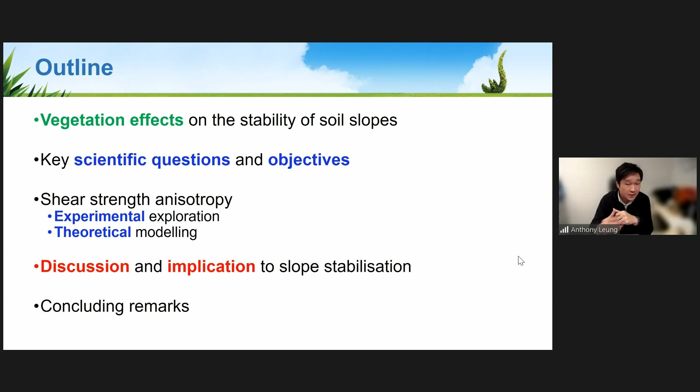Vegetation is a nature-based solution we can adopt to upgrade slopes in a sustainable way. This approach is environmentally and ecologically friendly, pleasing to see in urban areas, and can enhance biodiversity, ecological restoration, and carbon offset. But from an engineering perspective, vegetation can also be used as a tool to upgrade our slopes.

Mechanically speaking, plant roots could reinforce the soil, especially in the shallow region, to improve slope stability. Hydrologically, plants transpire, and during this process soil drying increases soil matrix suction, which could also increase soil strength. Today I will focus mainly on the mechanical effect, to explore how root reinforcement could be beneficially used in slope stabilization problems.

If you look at slope stability design, we can define a failure slip like this. Along this failure slip, the major and minor principal stresses of the soil are rotating. The reinforcement effect by the root depends on the relative orientation of the root and the direction of the major principal stress. So for a given root distribution, depending on position, the root reinforcement effect could differ because the major principal stress is rotating along the slip surface.

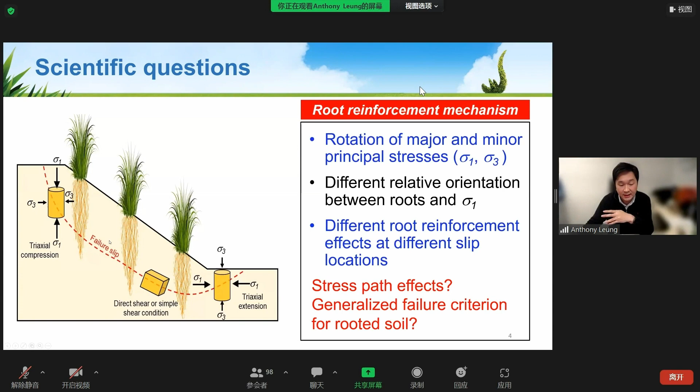So we ask the question: what are the stress path effects? Along the failure slip we have different types of soil shearing modes. Direct shear box testing is commonly used for evaluating root effects, but soil elements near the crest and near the toe actually experience not direct shear conditions, but triaxial compression and triaxial extension. So what would be the effect of stress path on the mechanical behavior of rooted soil?

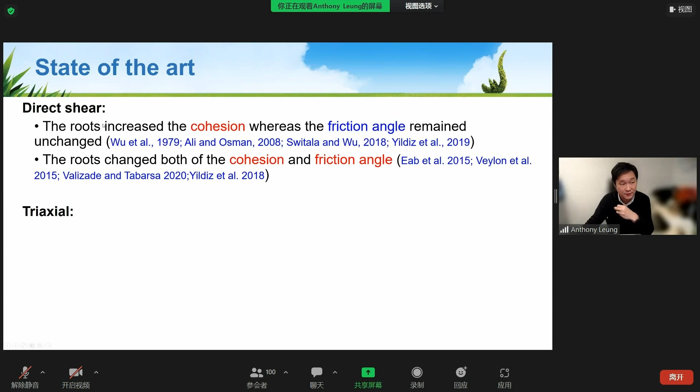Do we have any generalized failure criterion to describe the root effect on slope behavior? We looked into the literature on what's been developed in the last 20 or 30 years. Most studies focus on direct shear box testing, and most found that cohesion of the soil increases because of roots, but the friction angle remains largely unchanged. Only a few studies show that roots change both cohesion and friction angle. Those are for direct shear tests, but we do have some literature looking at triaxial behavior in compression and extension.

They do find some changes in the friction angle and cohesion too, but not a lot of studies. So we still find a lot of research gaps focusing on how the stress path would affect the shear strength parameters, including the dilatancy of the rooted soil, which still remain unclear.

Talking about the failure criteria, we have several models available to capture the root effect on reinforcement. One of the very famous models is the Wu and Waldron's theory, which assumes all the roots will break at the same time during the direct shearing mode. We also have the fiber bundle model to improve the assumption for the Wu's model by allowing progressive failure of the roots rather than simultaneous failure. And if we allow for a more expensive numerical simulation, there are finite element approaches using the p-y technique that could model the root-soil interaction for slope stabilization purposes.

None of these models have the ability to capture the potential anisotropy problem for rooted soil, because of the different orientation of the major principal stress and also the root orientation. There's no theory developed to address this anisotropy issue.

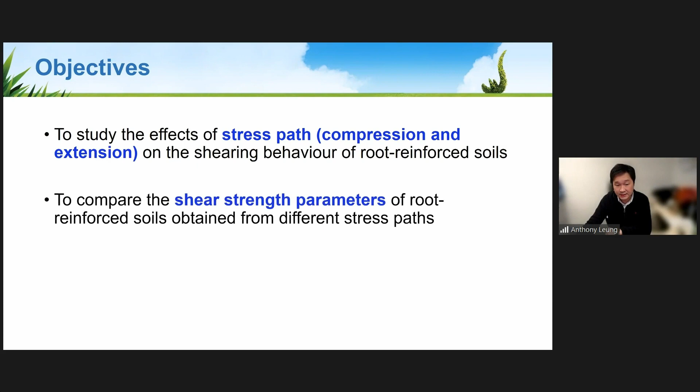Based on this, we developed several objectives. First, to study the effects of stress path, including compression and extension, on the shearing behavior of rooted soils, and to compare the shear strength parameters obtained from different stress paths. Based on experiments, we hope to develop a model to capture the shear strength anisotropy of rooted soils.

We use the triaxial testing system available at the Hong Kong University of Science and Technology. The soil we use is the local soil called completely decomposed granite, which is basically silty sand. We compact the soil to a degree of compaction of 80%, achieving a dry density suitable for plant growth in the urban area. This is the dimension of the triaxial samples we have been using.

After testing, we open up the samples to look at the root distribution using a scanner, so that we can better inform our modeling in the later part.

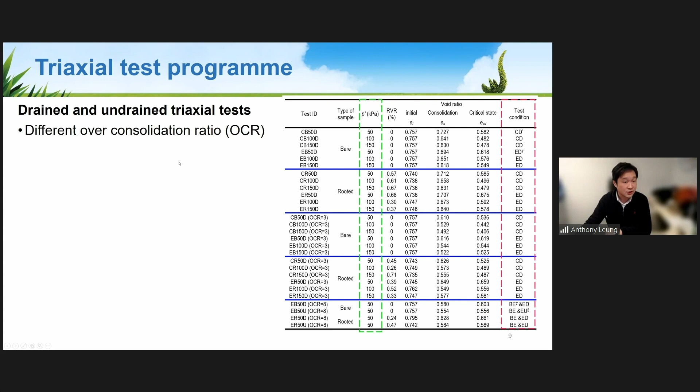We perform a standard triaxial test, drained and undrained shearing under different confining pressures, so that we can obtain the friction angle and cohesion. We also compact the sample to different initial densities, following a classic test procedure: first back pressure saturation, then drained consolidation to a given confining pressure, and then shearing at a relatively slow rate to achieve a drained condition. We also perform undrained shearing. I'm not going into details on this testing program, but we focus on different stress paths under different drainage conditions.

This is the typical result obtained from a normally consolidated soil. By the way, in the table here, we also investigated different over-consolidation ratios. So the OCR effect is also covered, but today I will just focus on the normally consolidated behavior.

Here is the stress-strain curve, deviatoric stress versus axial strain, for bare soil and rooted soil, both in normally consolidated condition. What you are seeing here is a set of stress-strain curves for bare soil under compression. If I superimpose the result from the rooted soil also under compression, quite surprisingly, you see the shear strength has been reduced by the roots. One reason is that as the root grows in the soil, it introduces interfaces between soil and roots, and the interface friction between the root and soil is much lower than soil-to-soil interaction.

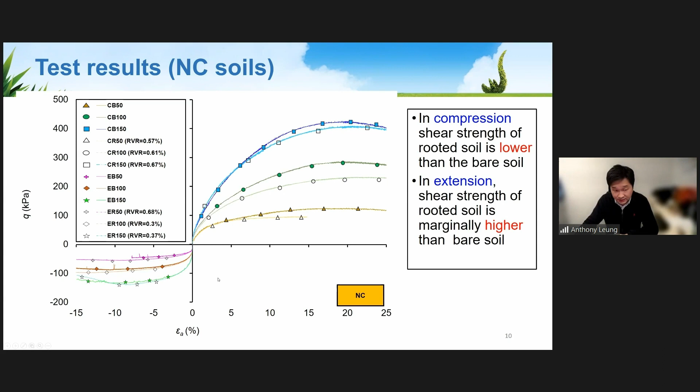So we observed quite interesting results. If you look further at the shear strength parameters, which means the friction angle and cohesion...

Now, if you look at the compression first, you can see that the rooted soil has slightly lower friction angle than bare soil. I already explained that's because of the creation of many soil-root interfaces. But if you look at the extension, the friction angle also reduced for the rooted soil, but the cohesion increased very significantly. You can see from 0 for the bare soil to something like 22 kPa for rooted soil in the extension, right?

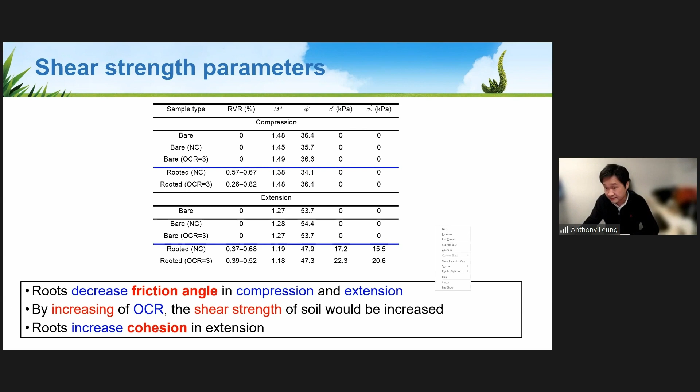That's what I just mentioned about the conclusion from these shear strength parameters. So in other words, the rooted soil behavior is stress path dependent, in other words, is anisotropic. So to capture these experimental findings, we try to develop a generalized failure criterion to capture this interesting behavior.

Now, in our experiments, we didn't observe any breakage of roots, so we couldn't use the philosophy or assumptions made by previous root reinforcement models like the fiber bundle model. So we have to assume all roots were not broken during the shearing. And one further assumption we need to make is that stress and strain are coaxial during failure.

And the root effects on the soil anisotropy can be described by an equivalent microstructure root network tensor. I'll introduce that later. Another important assumption we made is the cohesion and friction angle are independent of confining pressure. Now, I acknowledge this is quite a simplified assumption, but this is a very first model to develop, so we believe it would be easier or convenient for the development of our models.

So with all these assumptions, we try to define two fabric tensors. This tensor here, I won't go into the details of the mathematics, but it is to capture the soil microstructure without any roots, just on the soil structure itself for the bare soil.

Then we propose a new fabric tensor for root network to describe the root distribution. As you can see, the mathematical form is similar, actually the same as the bare soil fabric tensor, but using different parameters to capture the anisotropy or microstructure because of the root network development.

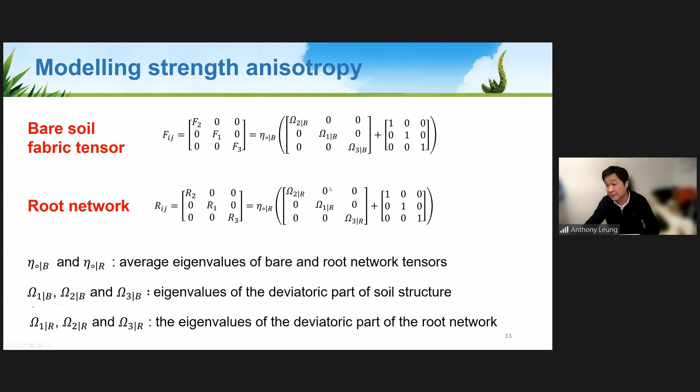So talking about the failure criterion, we adopted this Matsuoka and Nakai isotropic spatially mobilized plane model. This equation describes an isotropic soil, talking about the stress ratio or shear stress and the normal stress. So what we did here is modify this isotropic failure criterion to be anisotropic using the Kong et al. 2013 approach.

Basically, it's to project the microstructure tensor onto the direction of the generalized loading direction in that particular form. In other words, you can see this eta, which is an anisotropic parameter to describe the soil microstructure. We can further break it down using the previous matrix I showed you like this.

So what we did further here is propose another anisotropic parameter for rooted soil. If you compare those two equations, I have an additional term there to describe the effects of root network. So with this anisotropic parameter, we can then capture the anisotropy in this SMP model.

However, as I showed you earlier, the rooted soil is cohesive. Now, this Matsuoka and Nakai failure criteria is for frictional material without any cohesion. It couldn't perfectly model our rooted soil because it is cohesive, especially in the extension path.

So that's why we further expanded the formulation using the Matsuoka et al. 1990 model, considering cohesive soil. You can see the mathematical form is quite similar. Actually, it's just a transformed stress tensor so mathematically it's the same, but we have an additional term called bonding stress to capture the cohesion effect.

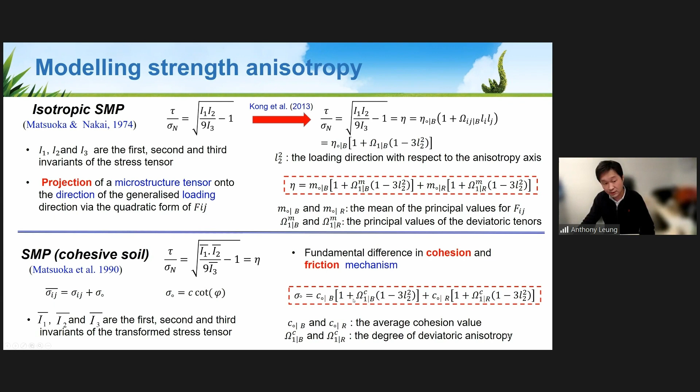Okay, so we then again modify this bonding stress by taking into account the root effect on the anisotropy of the soil. So these two red equations are the new development, considering the root effect on the anisotropic consideration of the soil microstructure, but also the anisotropy from the root network for the bonding stress. So now we have the mathematical model to describe the anisotropy of rooted soils.

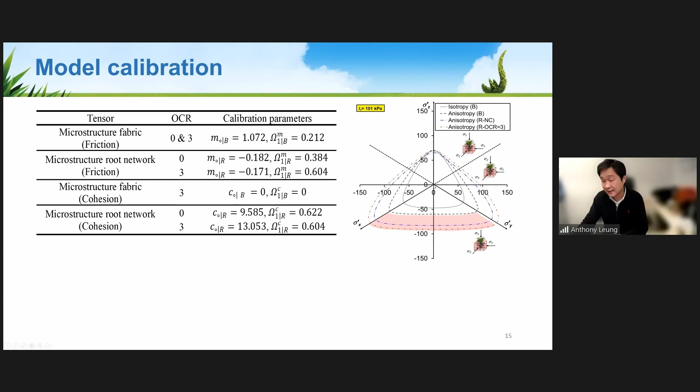You can see here the failure envelope for the rooted soil is always bigger than bare soil. That makes sense because the root is reinforcing the soil. But interestingly, in these two planes the root reinforcement is more important than other planes. So as an implication, as an engineer, you want to put your plant near the region where you have the stress path following sections 3 and 4, so that maximum root reinforcement can be achieved.

One important point to highlight: in the literature, for the direct shear box scenario, the friction angle didn't change much. That makes sense from our modeling, because the increase in friction angle is only linked to section 1, which represents the direct shear stress path. But if you look at the triaxial and extension path, the increase in friction angle and the change in cohesion are much larger. So our model also can capture the direct shear loading conditions, giving a quite generalized envelope for rooted soil.

Dr. Leung, you have 4 more minutes. Right, okay, so that would be my 2 last slides. Oh, okay.

We found that roots can also affect the friction angle, not only the cohesion as typically found in the literature. And evidently, root reinforcement effect is anisotropic and path dependent.

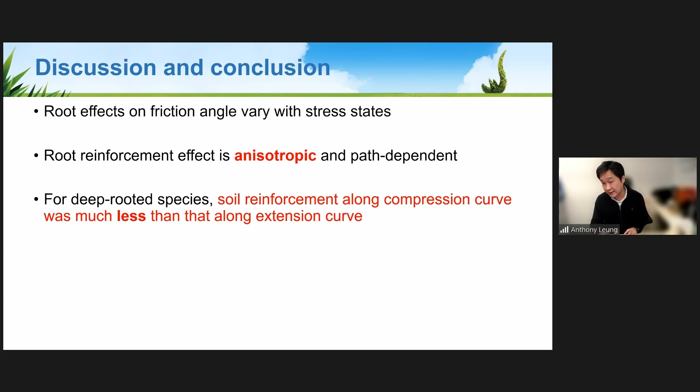For deep-rooted species like vetiver, soil reinforcement along the compression curve was much less than along the extension curve, because the major principal stress in compression is almost parallel to the root orientation for vetiver. But in extension, they are perpendicular to each other, so the root reinforcement effect will be much more significant.

So that demonstrates the anisotropic effect. Roots can mobilize the tensile strength much better along the extension path.

Coming back to our engineering problem, one advice we could take is that assuming friction angle to be unchanged by root may not always be true, depending on the slip position. For direct shear position, yes, maybe you can assume nothing changed in the friction angle. But for the crest and the toe, the friction angle could have been changed by the root.

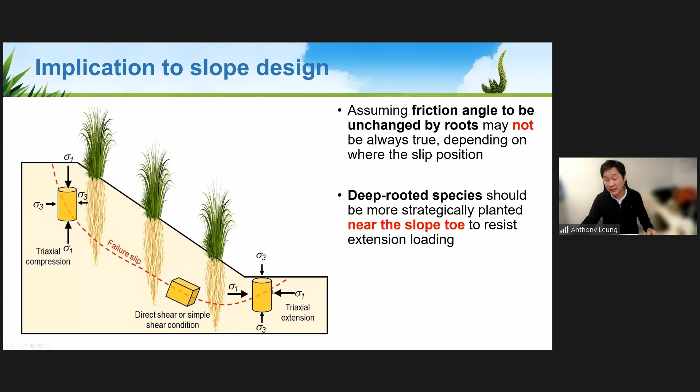If you select a deep-rooted species, we would advise putting it near the slope toe, because at that position extension is the more preferred failure mode, so the reinforcement will be more significant.

By the same token, if you have a laterally rooted species, you could put it near the slope crest, because at that position you will have a perpendicular direction between the major principal stress and the root orientation, giving you the highest root reinforcement effect.

So strategically, we shouldn't put only one species along the slope for soil bioengineering applications. We should smartly consider soil mechanics to arrange our species to maximize the slope stability effect.

All what I've been talking about is based on these 3 publications, which are already published, so if you're interested you are more than welcome to take a look. I also acknowledge my student, Ali Akbar, who produced all this very interesting work for this presentation. So that's it for my presentation. Thank you very much, and I welcome any discussion.

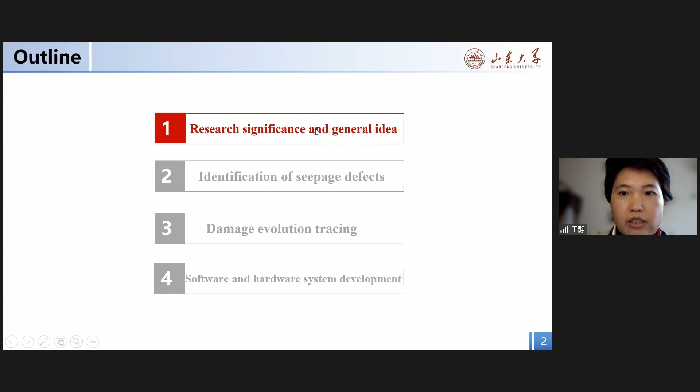My report includes 4 parts. The first one is research significance and the general idea.

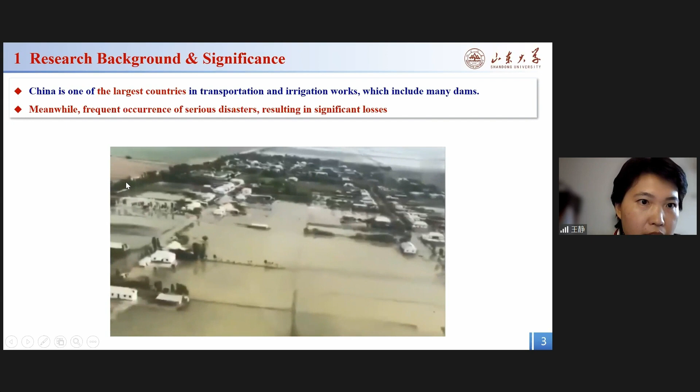China is one of the largest countries in transportation and irrigation works, which include many dams. Meanwhile, frequent occurrence of serious disasters results in significant losses. Leakage and breakage threaten the safety of the dams. Disasters are highly irregular in time and space, which are difficult to forecast. Regular inspection of dams is an effective measure to prevent disasters.

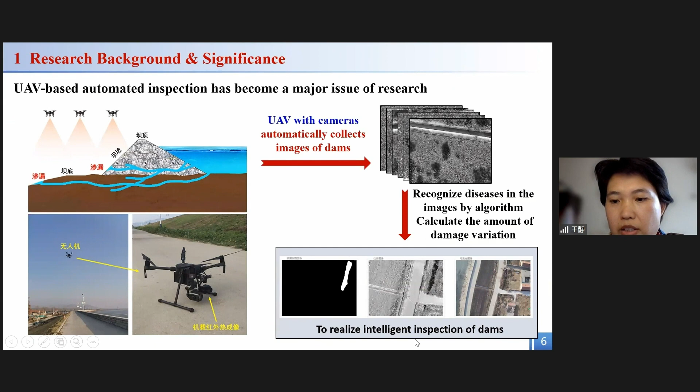UAV-based automated inspection has become a major issue of research. It can automatically collect images of dams and recognize diseases in the image. To realize intelligent inspection of dams,

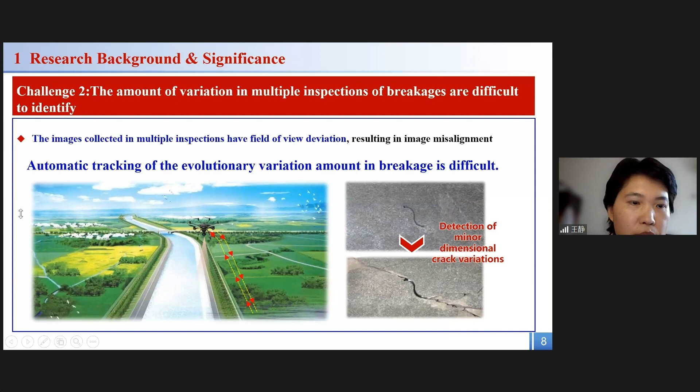Challenge 2: the images collected in multiple inspections have field of view deviation. Challenge 3: data collection methods are single. The data relying on manpower is at a low level.

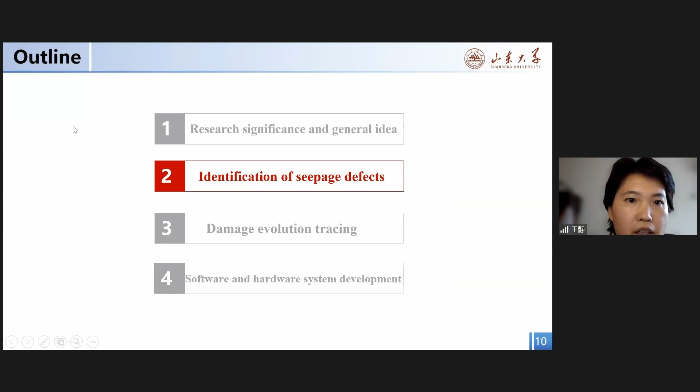The second part is identification of seepage defects. The dual-path dam's seepage identification method that combines infrared image and low temperature features achieved accurate seepage identification under vegetation occlusion and lush vegetation interference.

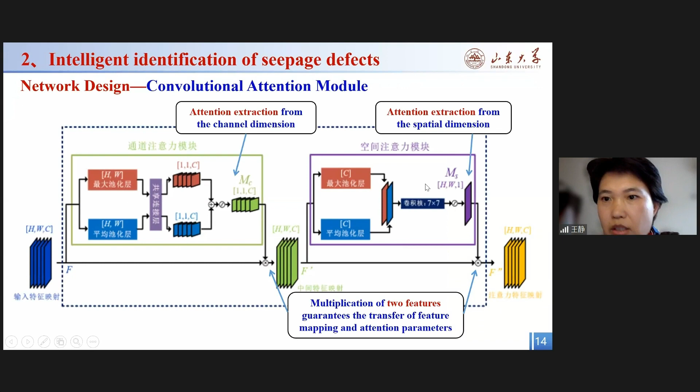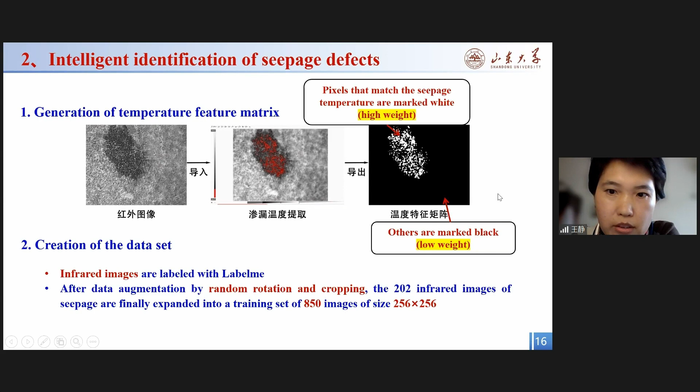Data were collected from the Anjing reservoir and Gongjiazhuang reservoir. Pixels that match the seepage temperature are marked white, with high weight, and others are marked black, with low weight. This is the explanation.

The third part is damage evolution tracing. The first step is fast identification of damage. For the problem of high noise caused by weather, light, and other environmental factors in aerial UAV imagery, a fast recognition method based on a rich-scale convolutional neural network for damage is proposed.

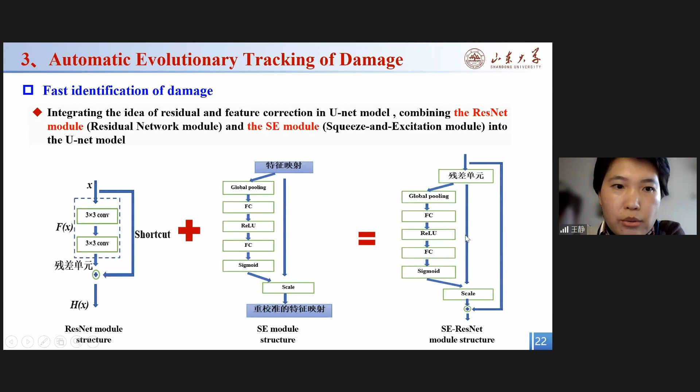Integrating the idea of ResNet, combining the ResNet module and the SE module into the U-net model, the designed SE-ResNet module replaces the convolution blocks used in the UNet module. The SE module can learn global information to selectively emphasize useful features, suppress background noise, fill damage low-level detail features with high-level semantic features, and improve the recognition accuracy of small-sized targets.

This is the experiment, and this is the result.

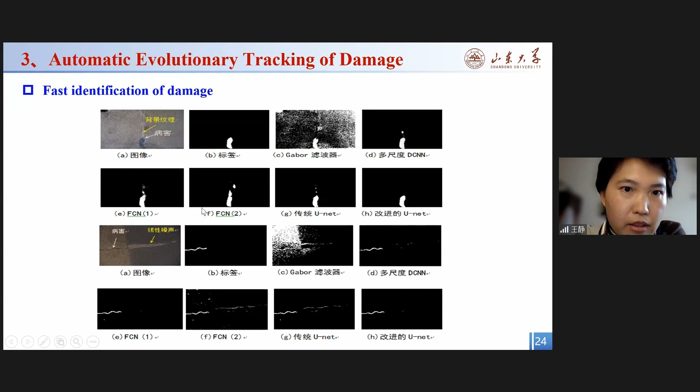The second step is damage evolution tracing. The UAV route is not fixed in multiple inspections, and the camera angle and height are not constant. Correspondingly small-sized targets appear under the inspected field of view. Non-target interference such as power lines and vegetation are commonly present.

This provides a damage evolution tracing method with embedded rich-scale feature extraction and spatial information, solving the problem of identifying time-shifted features of damage under conditions of view deviation and small target size.

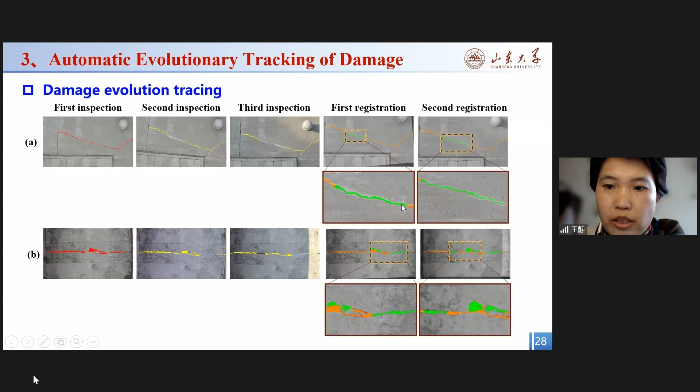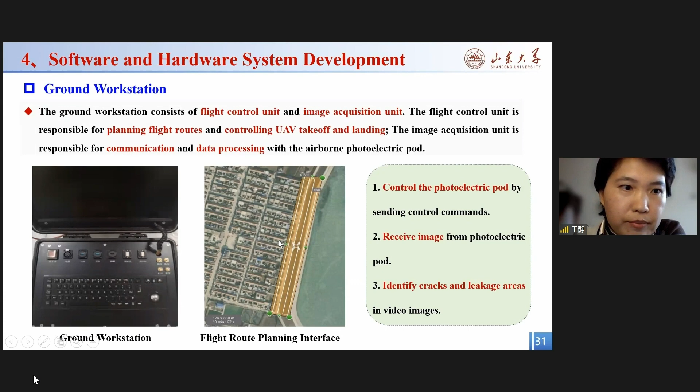This is UAV data acquisition. This is inspectors. This is data upload and transmission. This is server.

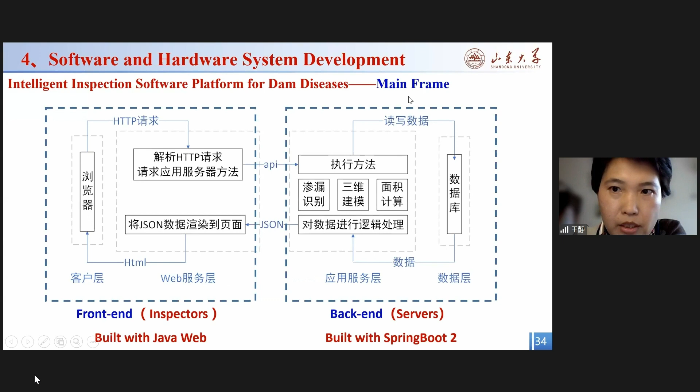The main frame consists of front end and back end. The interface includes a navigation bar and display operation area. The inspection task list includes task status and task priority.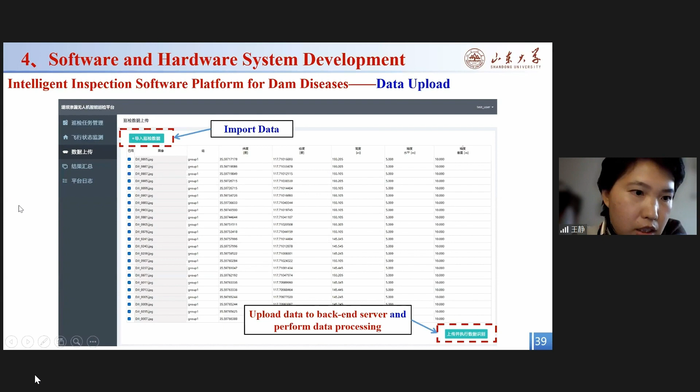This is data upload, this is the result summary. It includes identifying the image position and the leakage area in the figure. Mark the leakage location on the map.

Display leakage identification result. That's all. Thank you very much.

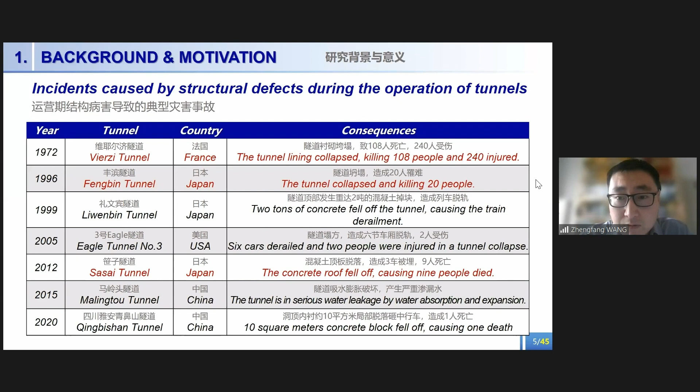This slide shows some accidents caused by structural defects during tunnel operation. Examples include the collapse of Sasai Tunnel in Japan and the block falling in Boston Tunnel in the United States. Those accidents also happen in China.

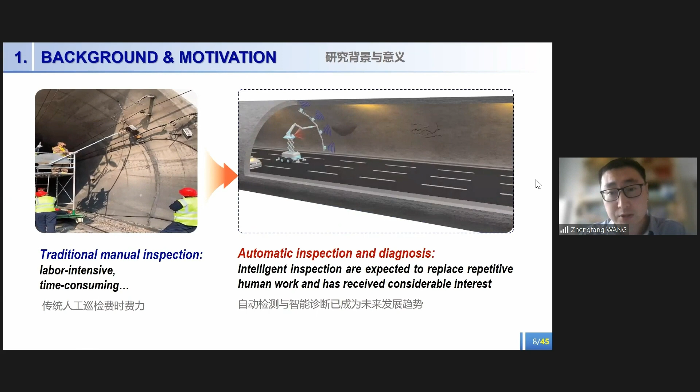Inspection and diagnosis of internal structure defects should be a priority for safety and economic reasons. Compared with traditional inspection methods, which are labor-intensive and time-consuming, automatic inspection and diagnosis are expected to replace human work and have received considerable interest in recent years. So in this talk, I will introduce some developments regarding internal structure defect intelligence inspection technologies.

Then I will move to the second part to tell you about the robotic inspection system. In order to realize automatic inspection of the tunnel, one issue to solve is how to automatically manipulate the GPR. Due to the complex surface of the tunnel and inevitable bending on the routing, usually the GPR cannot properly attach to the surface and automatically scan along it, so it's difficult to collect high quality data.

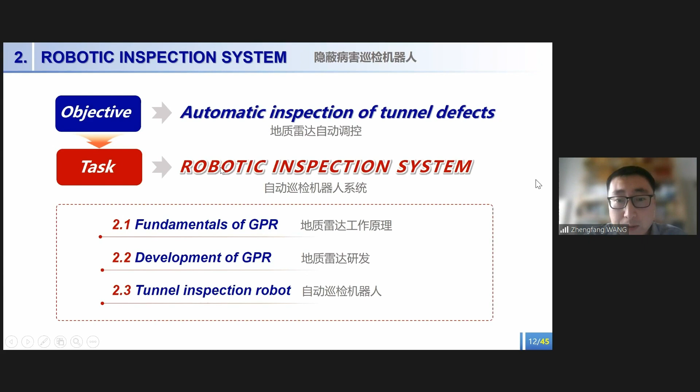In order to solve this issue, we developed a robotics inspection system. I will first introduce some fundamentals of GPR. GPR stands for ground penetrating radar. It's not ultrasonic radar, not LiDAR, not INSAR, not SAR. It's a widely used non-destructive detection technique for subsurface defects. The GPR usually has a transmitter and a receiver.

It transmits high frequency electromagnetic waves to penetrate the subsurface structure. The wave transmits at different speeds in different media, which is presented by dielectrics. When the signal returns to the antenna, we record the two-way travel time and amplitude of the signal to form a B-scan like this figure. Then from this B-scan, we can interpret what the defects are and where they are located. Also, we can reconstruct the dielectric distribution of the structure being detected.

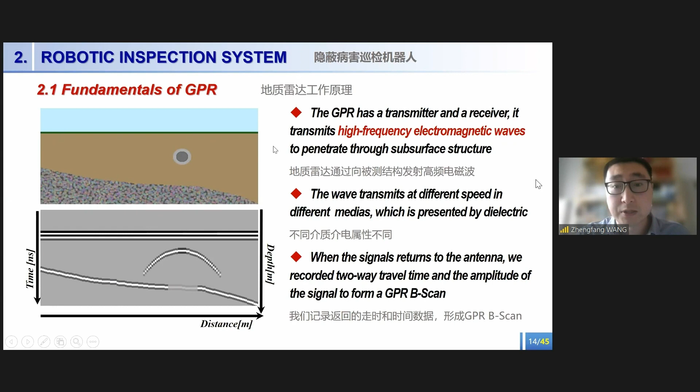We have developed our own GPR device. It is a compact GPR device, integrating a control unit and antennas. This device can be equipped on robot arms for automatic inspection. We utilize the robotic arm to manipulate the GPR to scan along the tunnel surface without obstruction.

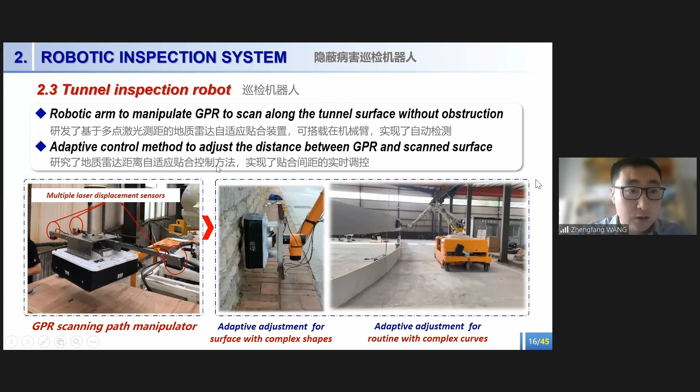The key technology we developed is an adaptive control method to adjust the distance between the GPR and the scanned surface based on information collected by multiple laser displacement sensors. The system can adaptively adjust the GPR for surfaces with complex shapes and routing with complex curves. We have developed the tunnel inspection robot, which is equipped with a GPR and a linear scanning camera for automatic inspection of surface and internal defects, being applied in practice.

In order to solve this issue, we developed some deep learning-based dielectric property inversion methods. Firstly, we developed a deep learning-based inversion method and designed a new deep neural network, which we call GPRINVNET, for permittivity distribution reconstruction and complex defects imaging from GPR data.

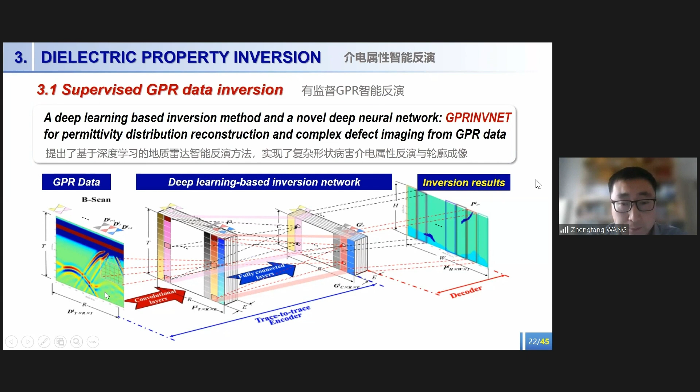Specifically, we designed a trace-to-trace encoder to enhance the feature of each GPR trace, using information from its adjacent traces, forming what we call an enhanced trace. With this enhanced trace, the relative permittivity that is spatially aligned to the enhanced traces was accurately reconstructed. The simulation validation results demonstrate that our method can accurately reconstruct the shapes of defects and rebar with clear boundaries.

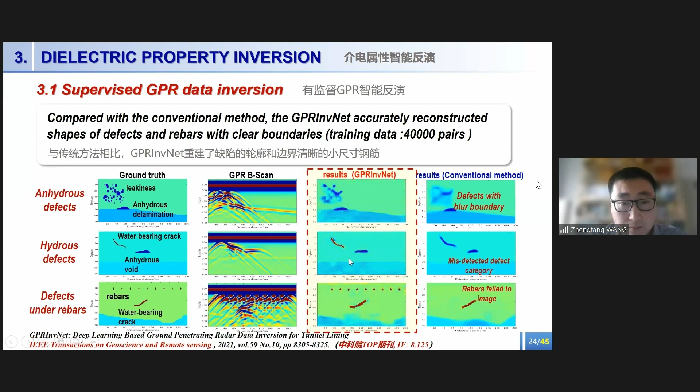As we know, GPR usually moves along the tunnel when performing inspection, then collects data of long survey lines. The existing method divides this data into several segments and uses a DNN model to process each segment separately, then splices the results. This may lead to distorted shapes and inconsistent dielectric values in the splice area between segments, like this.

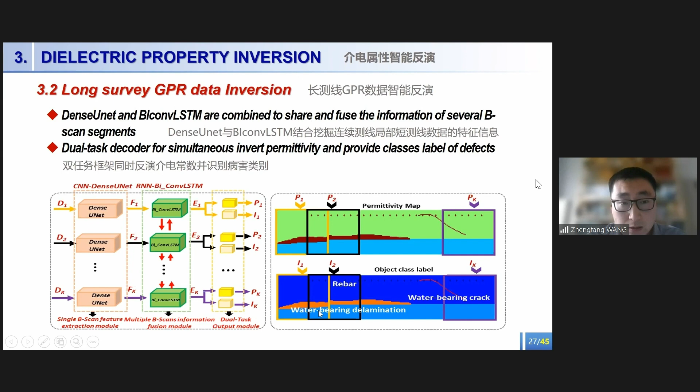The simulation results demonstrate that the distortion of the defect's shape and the inconsistency of permittivity value were mitigated, and the defect's category and permittivity distribution were obtained.

In order to validate this method, we built a concrete model and deployed artificial defects in it to simulate real-world defects. The result demonstrated that the method can reconstruct the shape of the anomaly and the dielectric distribution of the concrete for both water and air defects.

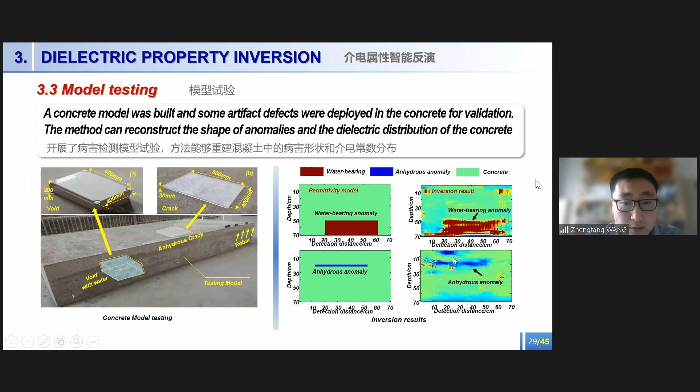We also built a sandbox model containing artificial defects for validation. The method retrieved its final result and provided us the permittivity inversion result and imaging of the defects. Then I will go to the fourth part.

Honestly, dielectric inversion is more for academic purposes. But in industry, all we need to know is the location of the defects and what the defect is. So the issue is how to identify the class label and location of defects from the GPR image.

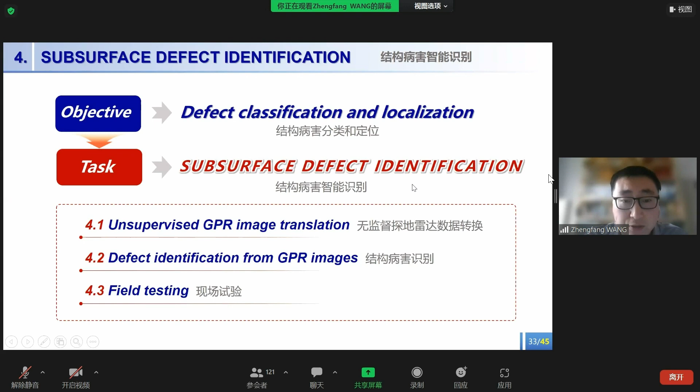To solve this issue, we started a deep learning-based subsurface defect identification method. The challenge is that currently there isn't an available dataset for GPR images, unlike natural images collected by a camera. Annotation of GPR images is time consuming, and more importantly, annotated GPR images from one tunnel may not be applicable to other tunnels.

So the issue is how we can identify inner defects when annotated GPR images are unavailable. We designed a two-stage method. In the first stage, we used an unsupervised actual-to-synthetic GPR image translation network to generate a translated synthetic GPR image. In the second stage, we use a DNN model, trained only on synthetic GPR images, for identification.

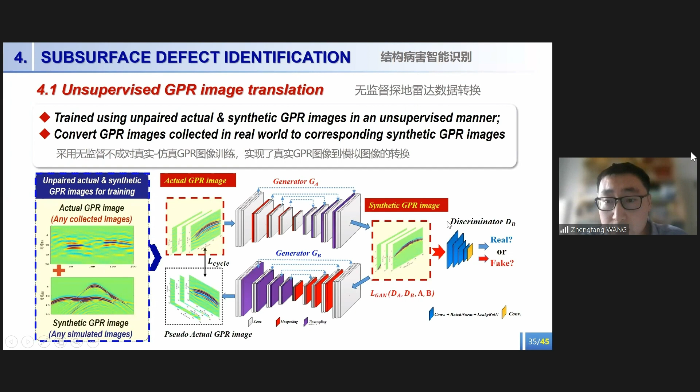To be specific, the unsupervised GPR image translation network is trained using unpaired actual and synthetic GPR data in an unsupervised manner. This network can convert the GPR image collected in the real world to the corresponding synthetic GPR image. The translated synthetic GPR image retains the characteristics of the defects and keeps the style of simulated data.

This is followed by a DNN model with a deformable convolutional kernel and a rotational region detection module to identify the category and location of arbitrarily oriented defects.

The key is we used a deformable convolutional kernel for feature extraction. It can adaptively change the shape of the convolutional kernel according to the shape of the defects, unlike the traditional kernel, which has a fixed shape.

The simulation result demonstrates that not only the category and location, but also the orientation of arbitrarily oriented defects can be detected. The method was also tested on the sandbox model, and it provided us the location, orientation, and class label of the defects.

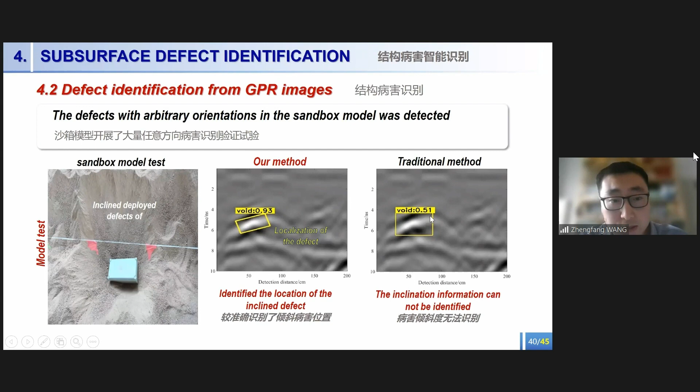Field testing was performed in several tunnels. The categories and accurate locations of arbitrarily oriented defects were identified. These are some results. In conclusion, we have developed a compact GPR tunnel inspection robot for automatic tunnel detection.

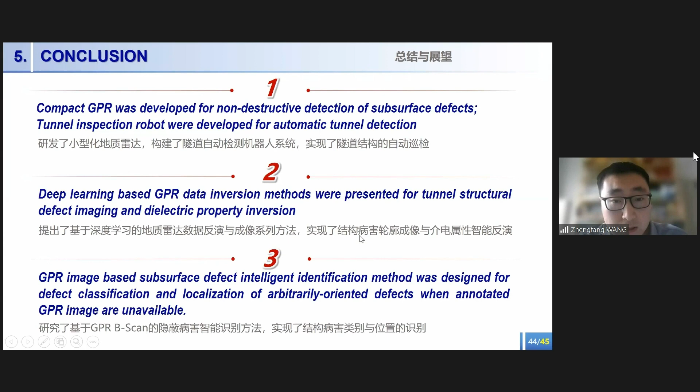Some deep learning based GPR data inversion methods were introduced for tunnel structure defect imaging and dielectric property inversion. A GPR image based subsurface defect intelligent identification method was designed for providing the class label and location of arbitrarily oriented defects when annotated GPR images are unavailable. That's all for my talk today. Thanks very much for your attention.

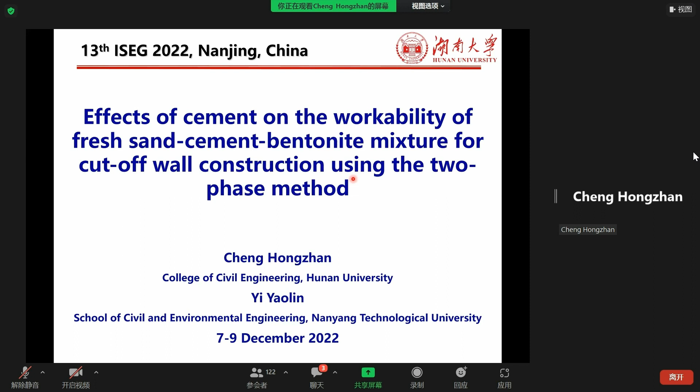My topic today is effects of cement on the workability of fresh sand, cement, and bentonite mixtures for cut-off wall construction using the two-phase method. This work was done at Nanyang Technological University with Professor Yi.

My presentation consists of four parts. First, I will introduce the research background. As we know, the cut-off wall with low permeability is usually constructed in soil, especially in sand layers, to prevent groundwater seepage for various civil engineering projects, like dams.

Earlier, soil bentonite cut walls had been widely used as vertical barriers to prevent groundwater flow. But recently, soil cement bentonite cut walls have been used more frequently because they have higher strength with the addition of cement slurries.

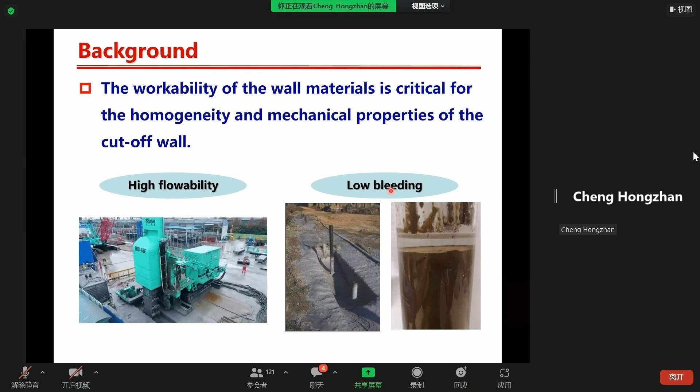Let's move to the second part of my presentation, which is about the workability of sand bentonite. It corresponds to the first stage of the two-phase TRD method.

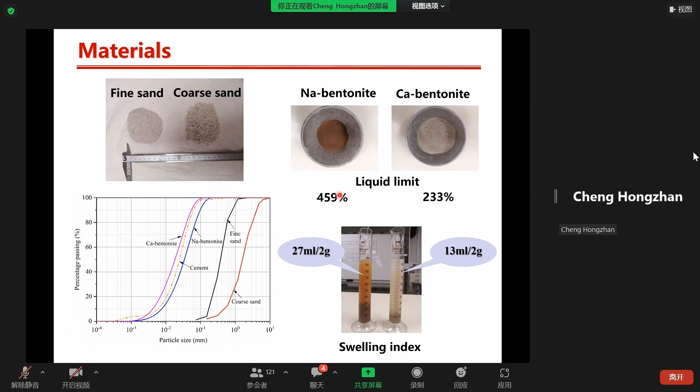To prepare our sand bentonite mixture, the dry sand and bentonite were first mixed in a mixer for 5 minutes, and clear water was added and mixed for another 5 minutes. This process is similar to the first phase of the cut wall construction.

Then the workability of the fresh sand bentonite mixture was immediately tested using the flowability test and the bleeding test. The flowability test used the flow table method, with a standard flow mold and flow spread diameter measurement. A larger flow spread diameter means higher flowability.

On the other hand, the bleeding test used a 1,000 milliliter cylinder, and the volume of bleeding water was recorded at the 3-hour stage. The bleeding ratio was defined as the ratio between the volume of bleeding water and the initial volume of water in the cylinder.

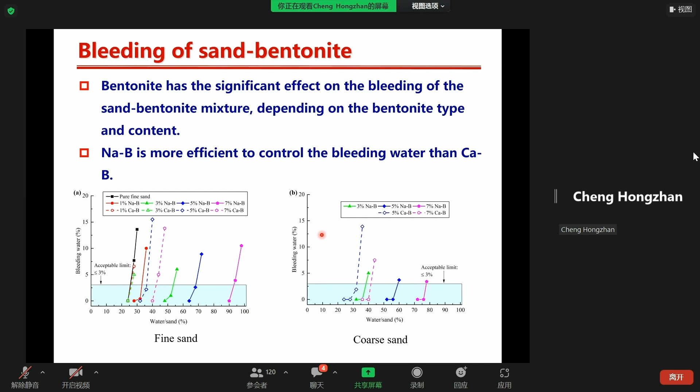It was expected that the bleeding water for both sands was increased by increasing the water to sand ratio. We can also find that the bentonite has a significant effect on bleeding of the sand bentonite mixture, depending on the bentonite content and bentonite type. Moreover, it's clear that sodium bentonite is more effective at controlling bleeding water than calcium bentonite. So we can conclude that sodium bentonite is better than calcium bentonite in terms of workability in the first stage.

Okay, the third part is about the workability of sand, cement, and bentonite, corresponding to the second stage of the TRD method.

5 sand bentonite mixtures were first selected to investigate the effects of cement slurries. A similar flowability of selected sand mixtures was selected, and no bleeding water was observed for these 5 workable mixtures. To prepare sand cement bentonite mixture, the cement slurry was added to the fresh sand bentonite mixture and mixed for 5 minutes. This process corresponds to the second phase of the cut wall construction, and this fresh mixture was immediately subject to flowability and bleeding tests.

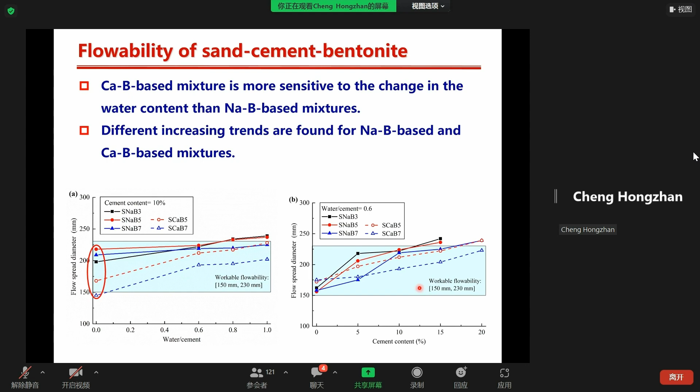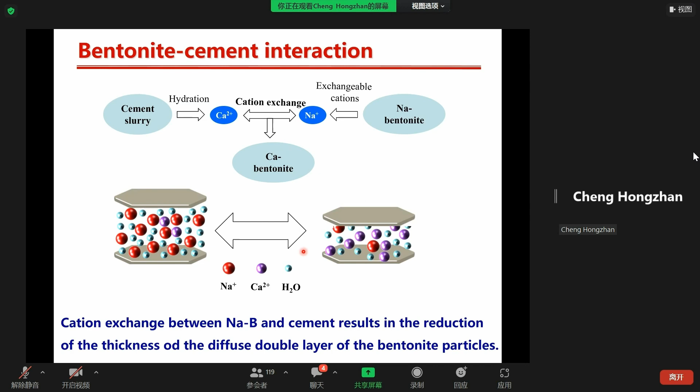For selected cement bentonite mixtures, we conducted the XRD test. The result confirmed the cation exchange between the bentonite and the cement, and this reaction led to a significant reduction in the water retention capacity and the swelling potential of sodium bentonite. We can also find that this reaction works very quickly.

Okay, the last part is the two main conclusions in our studies. The addition of cement caused a significant increase in the flowability and bleeding for sodium bentonite based mixtures in the second phase, because of the chemical reaction between cement and sodium bentonite, and the XRD results identified this cation exchange between them.

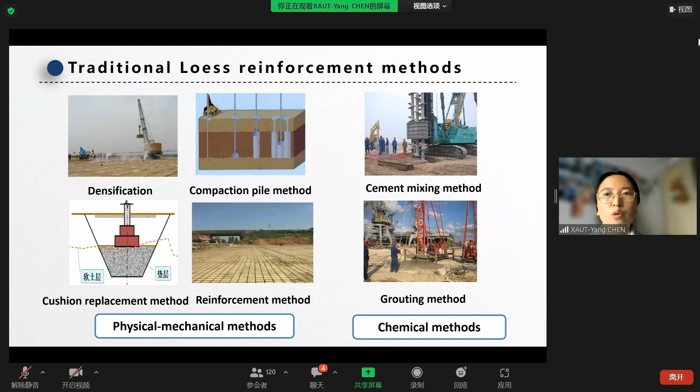MICP, by the way, is the initialism of microbial-induced carbonate precipitation. MICP is very popular in recent years, and it is applied to many other soil types, just like sand and expansive soils.

For loess soil, as far as I know, Professor Tang's group also did some pioneer research on MICP applications in loess soil. In this process, the ureolytic bacteria was injected into the soil, followed by the injection of the cementation reagent solution and also the urea.

The bacteria will hydrolyze the urea, producing carbonate ions. Then the carbonate ions react with calcium ions, and calcium carbonate is precipitated, which is a solid crystalline material that can bond the soil particles together.

The main purpose of our research is to present some hydromechanical improvements of MICP on loess. The loess tested in the current study was sampled from the Hanjiang to Weihe River Valley Water Diversion Project.

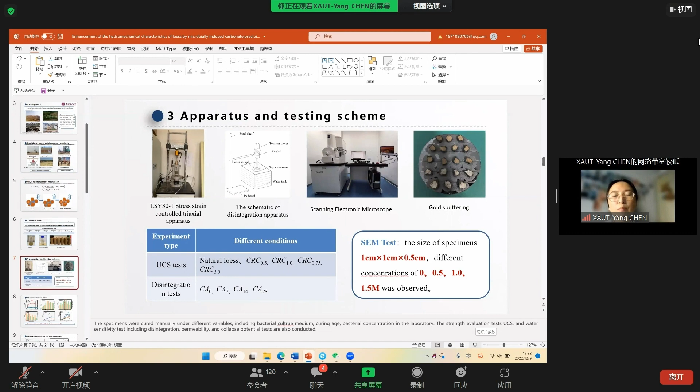It's better to know the MICP method is combined with an engineering project, so we also did some field applications. In this topic, I will only introduce the experimental studies. Different conditions, including the cementation reagent concentrations and also the curing ages, are considered. Some microstructures of the loess soil are also observed by SEM test and also MIP test.

First, we investigated the influencing factors of MICP. We concluded that the optimal conditions for the bacteria and urease activity are a bacterial inoculation ratio of 1%, a temperature of 30 degrees, and a pH of 8, and the best and optimum calcium source is calcium chloride.

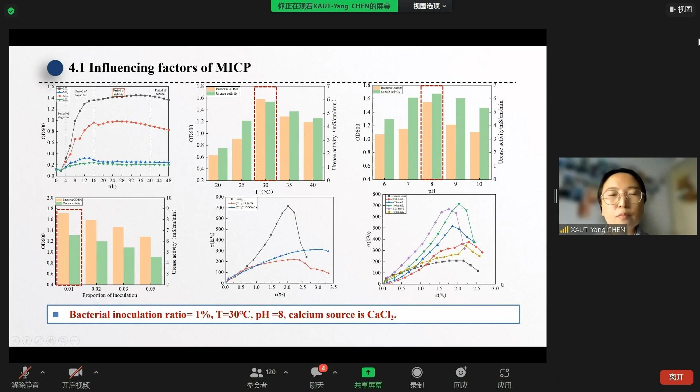Based on these basic factors, we conducted further research. We conducted a series of unconfined compressive strength tests to evaluate the enhancement of MICP on loess soil. From the stress-strain behavior, we can see that the largest UCS values occur at CRC equals 1 mole, reaching about 720 kilopascal, which is 3.6 times that of plain soil.

When CRC equals 1.5, the MICP treated loess strength was relatively low, only 1.8 times that of natural loess, which may be attributed to the fact that higher CRC means faster precipitation of calcium carbonate, which will block the surface of the loess voids, retarding the precipitation process.

Different curing ages are also evaluated. As we can see, when the curing duration increased from 0 to 7 days, the UCS value increased by about 41%. Then for the following 7 days, the average UCS value increased by 56%, which shows that the MICP method is very good for short-time enhancement of loess.

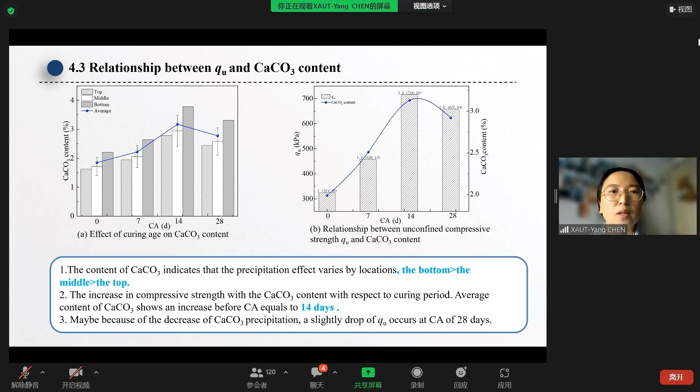The UCS of sand and loess both increase linearly with the calcium carbonate content. For the same retention period, higher UCS values were obtained with higher calcium carbonate content. So this covers the stress parameters of the MICP treated loess, and also the stiffness of the loess soils.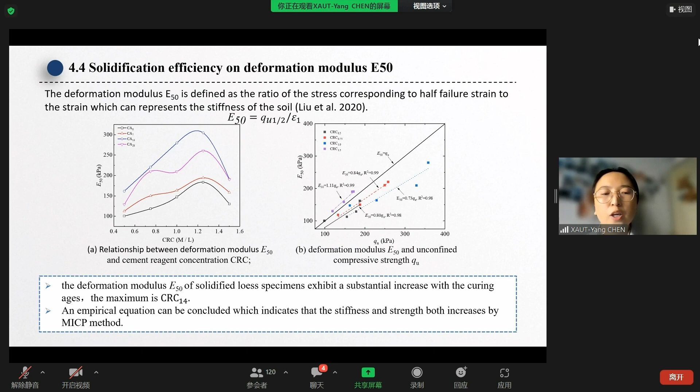An empirical equation can be concluded which indicates that both the stiffness and the strength of MICP treated loess are increased. For the hydraulic properties of the MICP treated loess, we conducted a series of tests about the disintegration rate.

From the propagation of disintegration rate curves, it can be divided into 3 stages. The initial stage: the loess sample was first immersed into water, and the disintegration ratio almost keeps constant, the sample keeps intact.

The second stage is a rapid disintegration stage. The loess structure damages rapidly, and the loose particles fall quickly from the specimen body.

The last stage is a stable stage. There are only some insoluble minerals remaining, and the spalling is retarded very significantly.

We also plotted the disintegration rate with various cement reagent concentrations and different curing ages. We can see that the final disintegration ratio of MICP treated loess can decrease at a maximum rate of 63.3%.

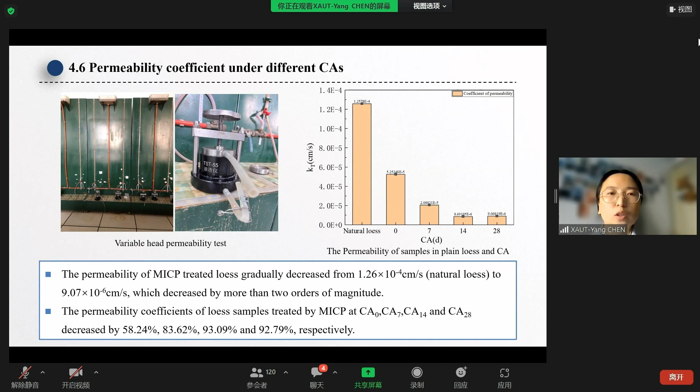So for the third property of water sensitivity, that is the collapsibility. As we all know, collapsible soils are very sensitive to water, especially loess. So the collapsibility test was conducted.

As we can see from the statistics, the average collapsibility coefficient of the 3 soil samples decreased by about 23.8% after a curing age of 14 days.

Further, we also conducted some microstructure tests. The electron microscopy images are listed here. As we can see, without MICP treatment, the surface of the loess particle is very smooth.

With the injection or participation of the MICP treatment, some cement aggregates are accumulated between the loess particles, and the loess voids were filled by calcite crystals, which can bond the soil particles together.

So the calcium carbonate precipitation plays the role of filling, cementation, and blocking, which can increase the integrity of the samples.

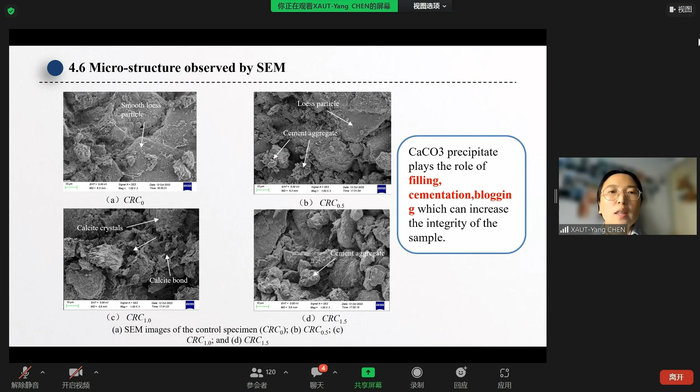That's all of the presentation, and some conclusions can be drawn. From our research, we can know that the maximum enhancement in shear stress was achieved

when the loess sample is treated under a cement reagent concentration of 1 mole, curing for 14 days. Compared to untreated loess, the uniaxial compressive strength can be increased by 3.6 times.

Also for the UCS values of MICP treated loess, roughly the maximum increase is about 3.6 times at a curing age of 14 days. As we concluded, MICP is good for short-term curing to increase the loess stress.

Also the calcium carbonate precipitation can bridge and bind the voids between loess particles to improve the shear resistance of MICP treated loess, and it can effectively reduce the disintegration rate of MICP treated loess.

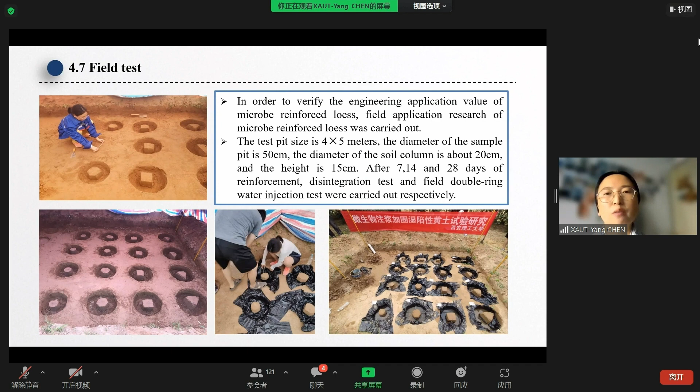We also conducted some field tests, and I hope I can have a future chance to share with you guys. Thanks for your attention.

I'm so sorry, can you hear me now? Sorry for the internet.

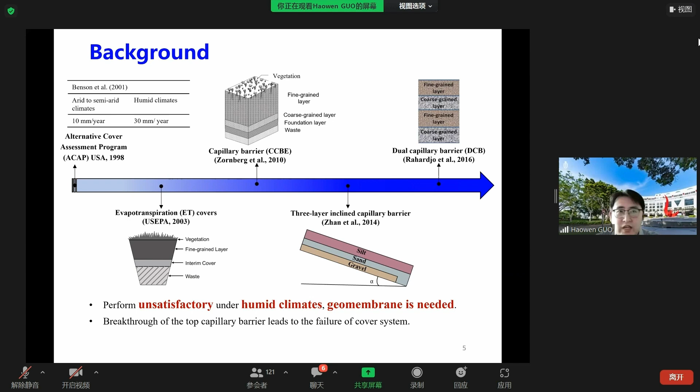Therefore, a three-layer landfill cover system was proposed by our group. The cover can work by combining the benefits provided by the upper capillary barrier and the bottom low permeability layer to prevent water percolation as well as gas emission. Previous laboratory tests and field tests have proved the effectiveness of the landfill cover system in humid climates, and also the elimination of the use of geomembrane.

But the performance of the landfill cover system using recycled concrete is still unknown and needs to be further studied. So to tackle this limitation, this study proposed a multi-dimensional research program including 1D soil column tests, 2D flume tests, field monitoring, as well as numerical analysis.

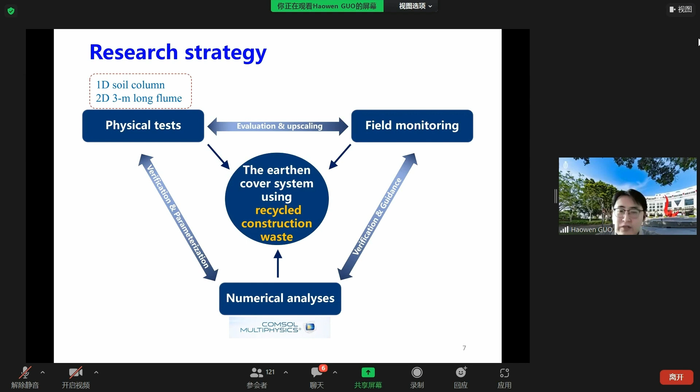The 1D test includes two soil columns. Each combines a 0.4 meter top FRC layer, a 0.2 meter CRC layer, and a 0.4 meter residual soil layer. We installed tensiometers and moisture probes every 10 centimeters to measure soil suction and volumetric water content changes along the soil. For the top boundary of those two columns, we set a 0.1 meter constant water height.

This lasted for 8 hours to simulate a 60-year return period rainfall in Hong Kong. The bottom boundary was specified as free drainage.

This slide shows the measured and computed variation of matric suction in those two columns before and after ponding. The measured and numerical results match reasonably well. We can find that before ponding, the initial suction in the grass column is larger than that in the bare one. This is mainly due to evapotranspiration induced root water uptake in the top layers.

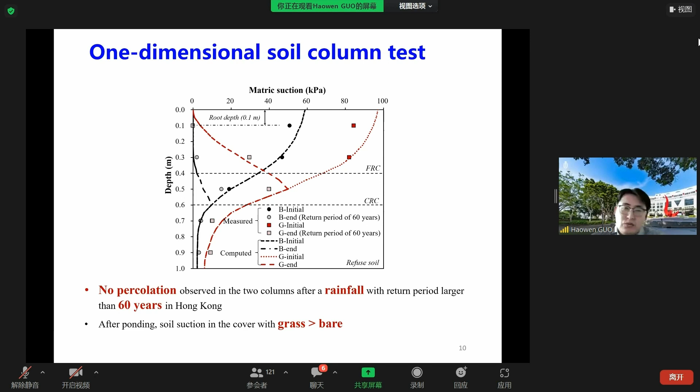In this study, the rainfall return period is fixed at 100 years for Hong Kong. The rainfall duration was changed from 4 hours to 12 hours. The inclination angle of the cover system was changed from 3 degrees to 18 degrees according to national standards. Tensiometers and soil moisture probes were also installed every 10 centimeters in the flume.

In this study, we mainly presented the measured results in the middle section. We also installed a rain gauge and other equipment to measure the water balance components during the test.

As the heavy rainfall started, the soil suction near the surface was the first to be influenced by water infiltration, whereas the matric suction in the middle CRC layer and the bottom layer was not changed after the rainfall.

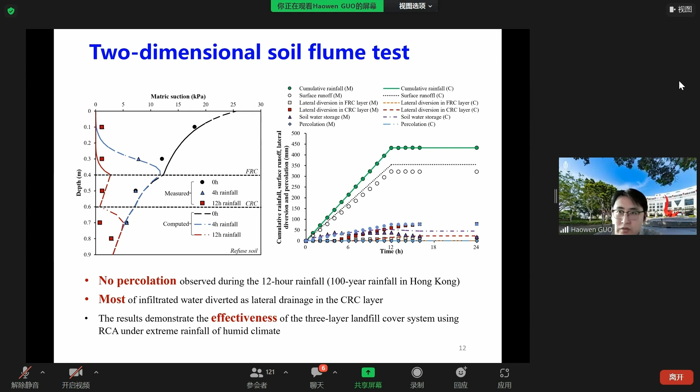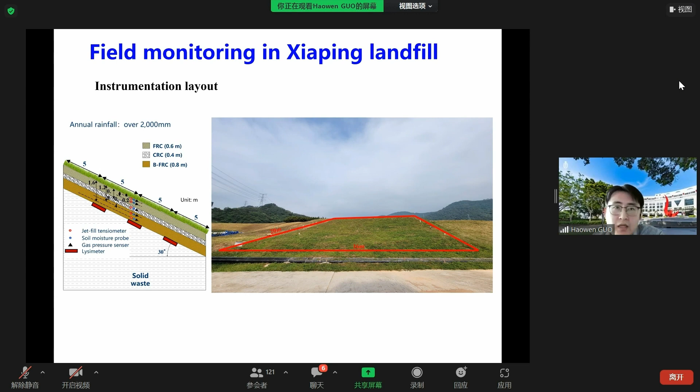And I draw some conclusions: find the beneficial effect of the grass, and also provide recommendations for the particle combination of the cover system.

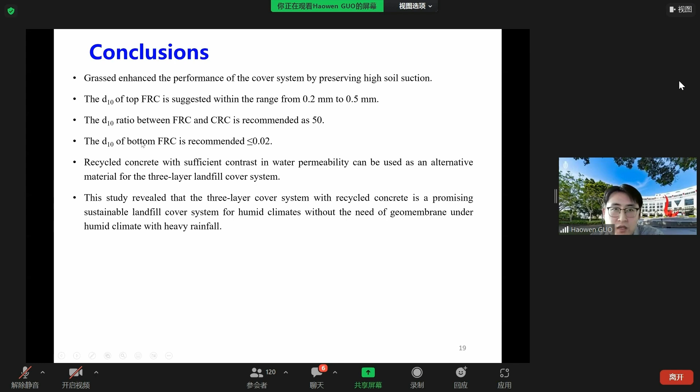As for the way forward, the function of the cover system is built essentially on the particle size and hydraulic property of the materials, so all materials that can be crushed into a suitable particle size can be used as material in the cover system. Real bricks, glass, as well as the fine fraction of aged municipal solid waste can also be used in the cover system, because those waste materials exist in very large amounts, but their strength is not high, so they cannot be recycled in construction engineering such as roads and buildings.

We also have some other application scenarios, such as slope stability systems. Our cover system can combine with plants, as mentioned previously by Professor Liang, and we also localize the green system for the sponge city.

So that's all my presentation. Thank you for your attention.